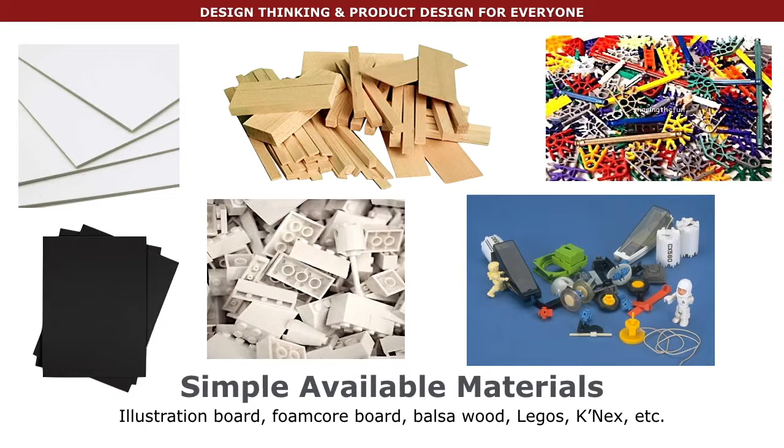Physical design mockups are made of simple, easy to work, and readily available materials such as illustration board, foam core board, balsa wood and basswood, Legos and K'NEX parts, various toy parts, and other appropriate materials and elements. Joining and connecting the materials for mockups is also simple and uses familiar and readily available adhesives and methods such as tape, super glue, wood glue, and hot melt glue, among others.

Paper mockups, as simple as they are, can be very valuable even throughout an entire project. They are easy to create and modify, and they facilitate fast responses.

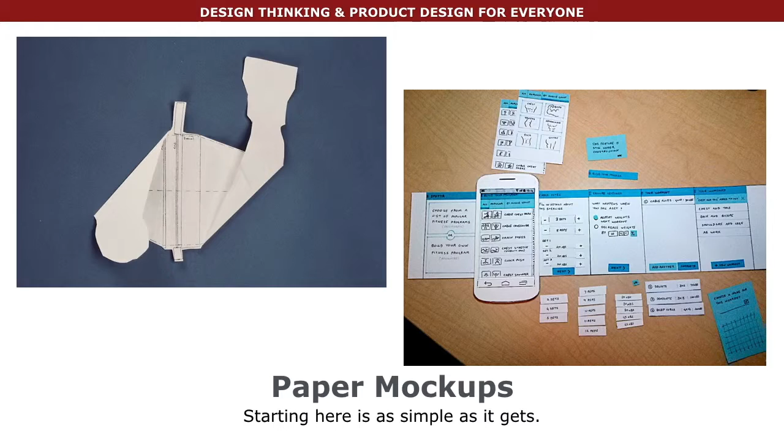Rough, low-fidelity mockups can be made from all kinds of simple materials, from paper to corrugated cardboard to Lego blocks, and quickly joined with tape or superglue. These rough, low-fidelity mockups are usually created early in the design thinking process to quickly evaluate various ideas, concepts, and configurations during an initial exploratory stage.

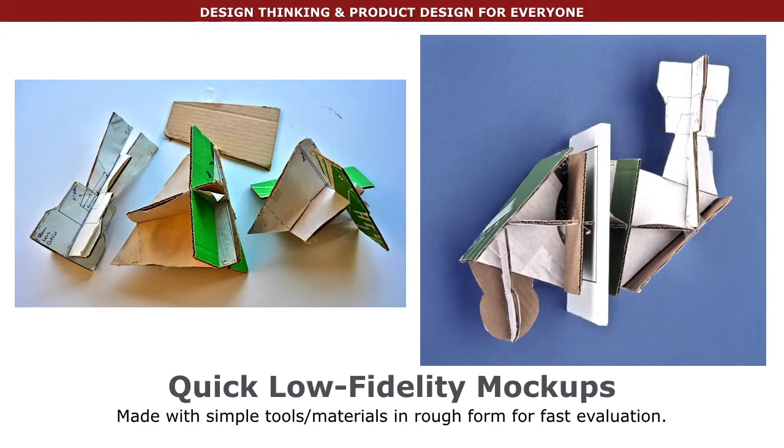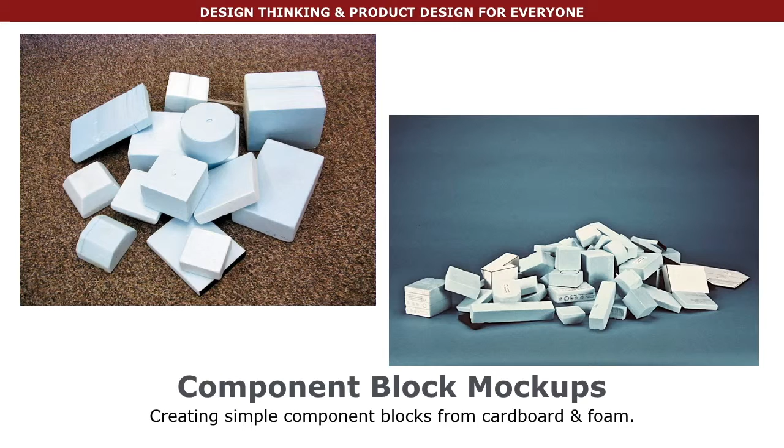Simple block mockups of a product's components can be created and then assembled into various component configurations to help determine the optimum product layout and orientation of components.

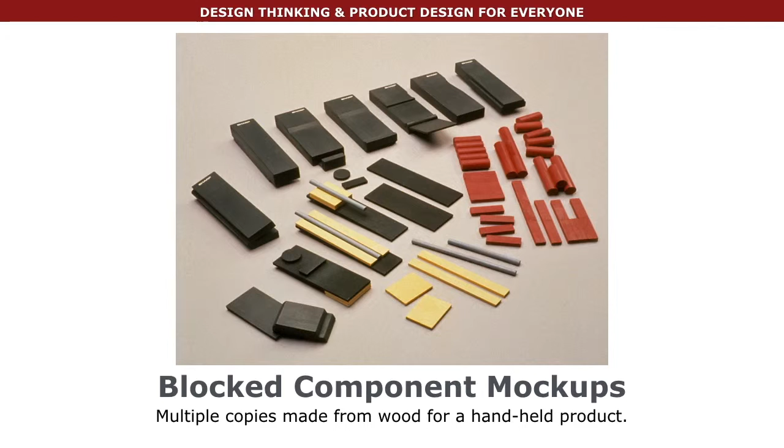It is good process to first make simple block mockups of all of a product's possible components, including multiples of them, to be able to create several alternative product configurations. These component mockups are then used to create various three-dimensional compositions of a product's layout possibilities and help decide on a final product configuration, component selection, and part layout.

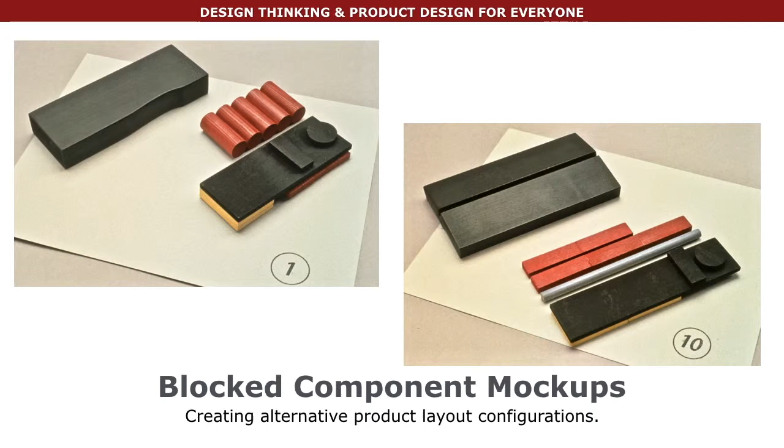This component block configuration process also helps with optimizing a product's design for usability, assembly, cabling, airflow, service, maintenance, and upgrade.

As a product design develops, more precise product component mockups can be made to get a more accurate product configuration, architecture, orientation, layout, and detailed design.

Often, creating every single component and part of a product in its later development stages can help to find and resolve critical issues such as in assembly, manufacture, service, repair, accessibility, and maintenance.

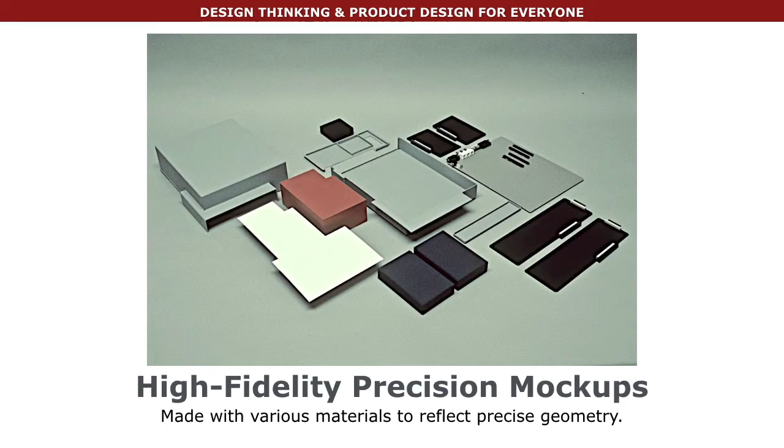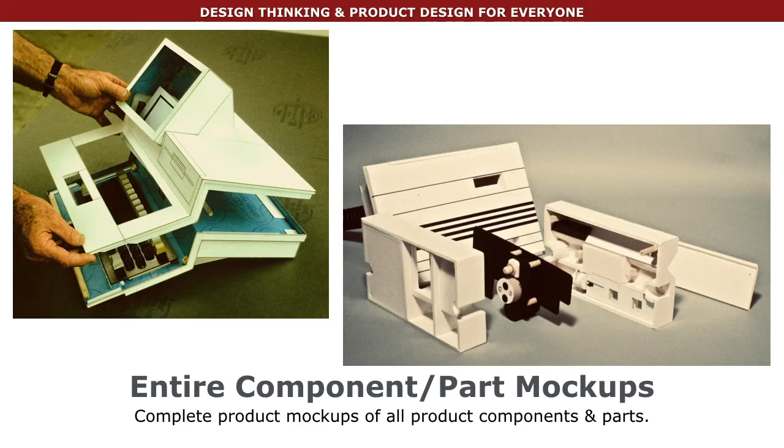These kinds of complete product precision mockups also help others outside of product design visualize and understand the overall product better than can even a CAD image on a screen.

Low-density and high-density foam can also be used for both rough and precision mockups. These can be handcrafted or machined to specification.

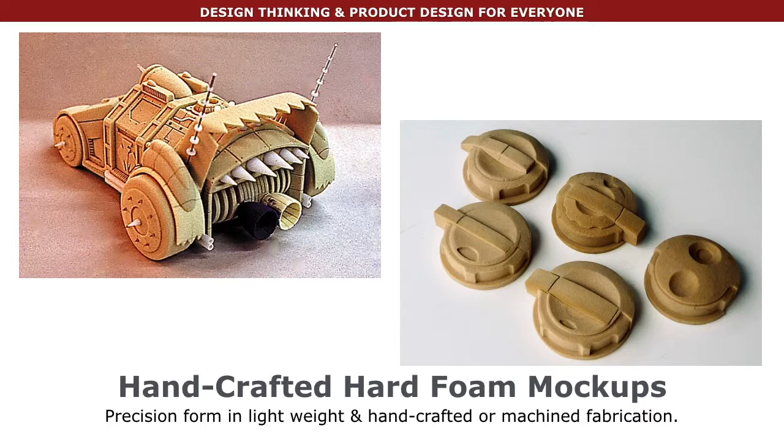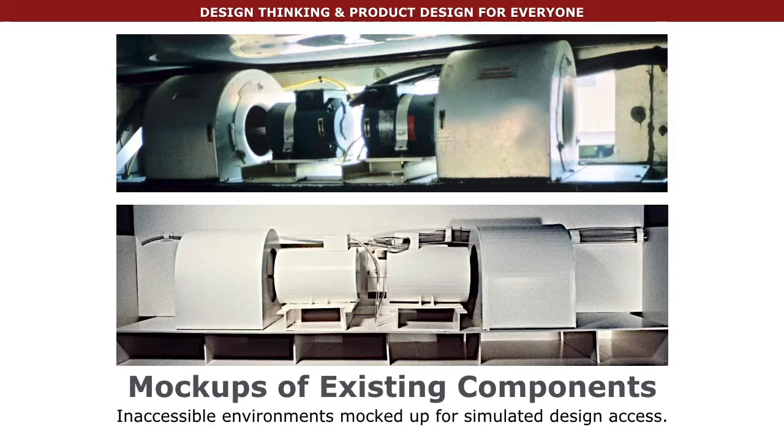Often, actual product environments are unable to be accessed easily or as frequently as needed for product design form and fit evaluation. These real environments and their features can be mocked up and be used in the design lab for simulated study.

In such cases where a mock-up of an existing real product space and components is created in the design lab, the product design form, fit, service, accessibility, and other key issues can be more easily investigated and tested.

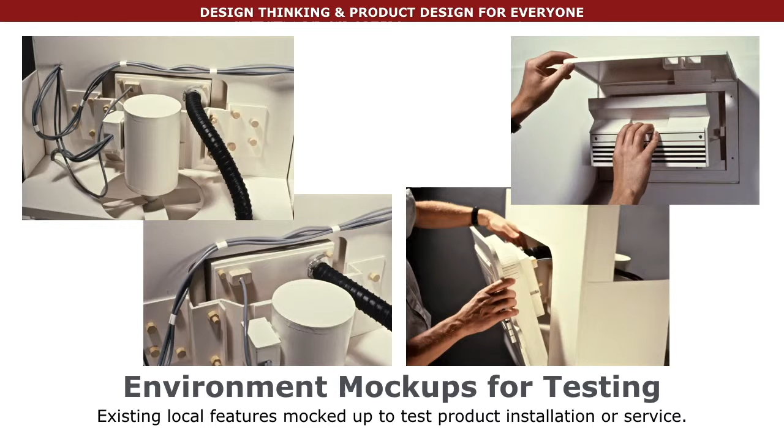Physical design mock-ups, where multiples of all the relevant components are simulated, lend themselves to excellent group collaboration and evaluation. All parties from various key disciplines can actively participate in the product configuration process.

For large-scale projects where an accurate perception and feel for space, human movement, and interaction is essential for design success, full-size mock-ups can be created from lightweight and easily constructed materials.

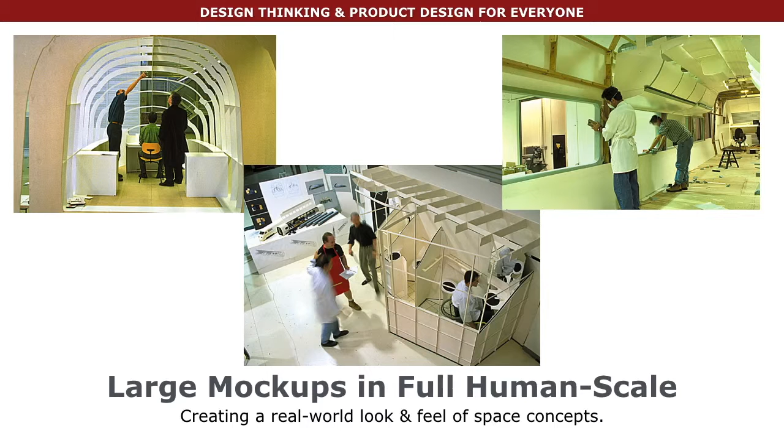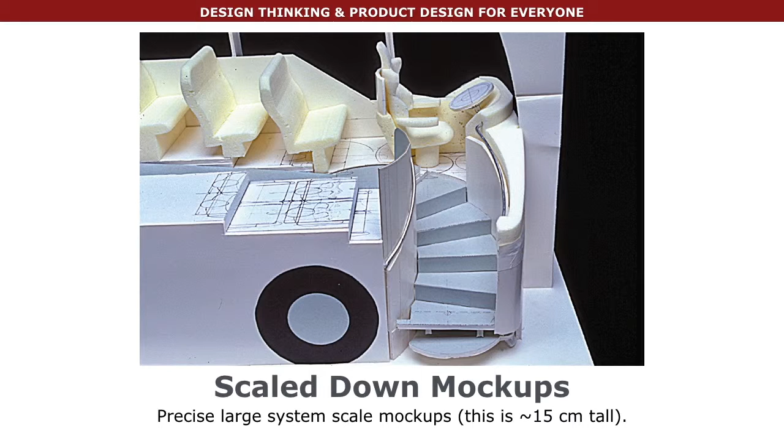Quite often, for large-scale products, it is appropriate to create early scaled-down mock-ups of the systems for exploration. Such scale mock-ups can be very precise and represent the larger systems adequately for early evaluation. After these scaled-down concepts are reviewed, larger full-scale mock-ups can be made.

In later stages of development, where precise product part and component detail specifications are available, precision machined and crafted product components and parts can be fabricated to represent a precise assembly. Even at this stage, design issues are often discovered when each detail is created for evaluation.

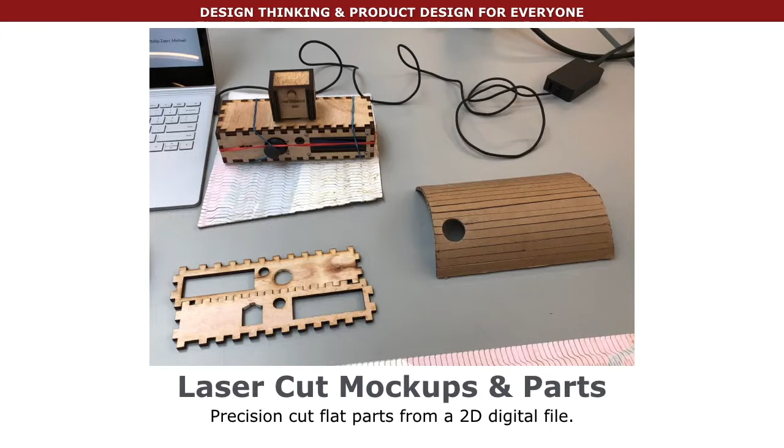Laser cutting of flat sheets of wood, plastic, or bamboo can be a very useful product mock-up making process. With the advent of CAD and 3D printing, it is possible to create simple and complex CAD models of products and their parts and components at any stage of design thinking, and then 3D print them for evaluation and testing.

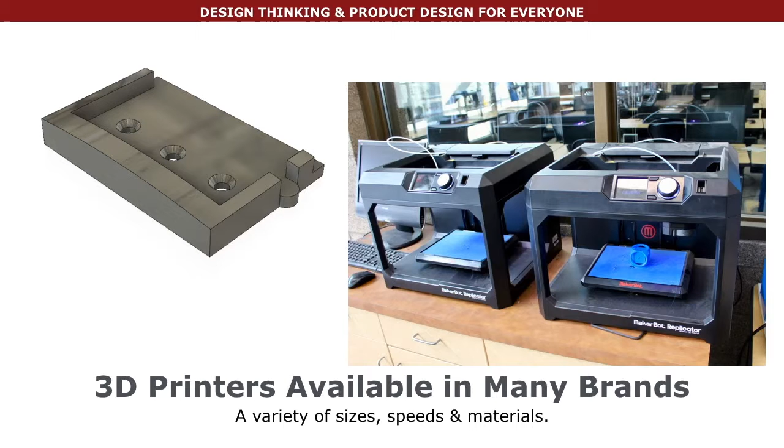In the end, the product designer has multiple methods and materials available to make physical design mock-ups. What type and method is chosen will depend upon the design simulation need in the particular phase of the design thinking process.